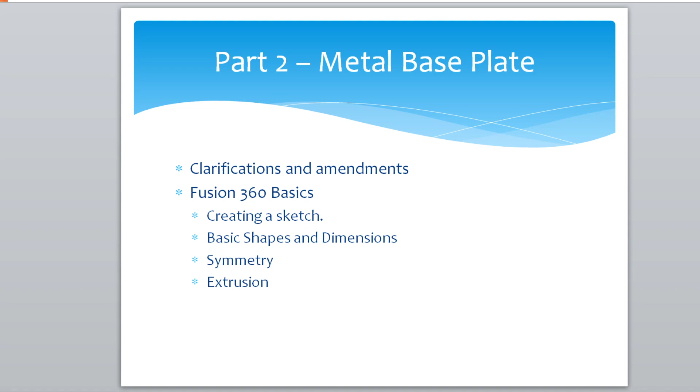Now for the third one, what we're going to look at is we're going to continue our Fusion 360 basics, and create a cutout drawing for our switch. We're going to export this as a DXF file, which basically means drawing, but it's a file format. We're going to open our previous model that we created last time, and create a drawing with a pattern feature.

We're going to import the cutout DWG, and move the cutout around. Then finally we're going to use the 3D cutout operation, or I believe it's called extrude again in this package, to actually put the cutouts into the panel we've created.

So the first thing we're going to do is we're going to be looking at creating a cutout drawing. For that we're going to be using Fusion 360 as the previous video we did, and I've just started it afresh, and this is how it looks when you open Fusion 360 for the first time.

So all I'm going to do at this moment in time is create a simple drawing for the actual cutout switch itself. For the drawing, again I repeat what I did previously. I'm going to click the sketch icon there, and just select the top plane.

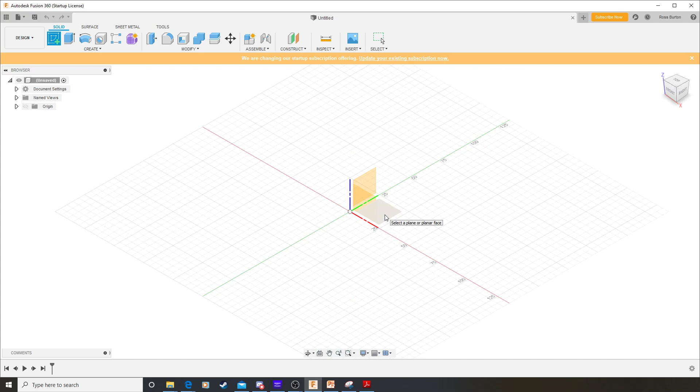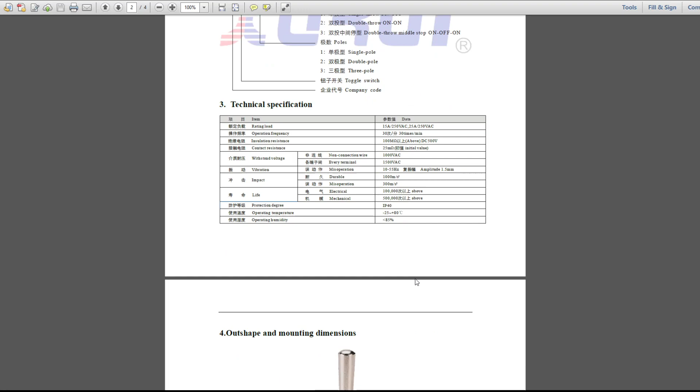Done. Okay, now the actual shape we're going to be doing, there's the question. So if I open the specification for the switch and we go down, we'll get to the cutout drawing here. We can see the details for the switch, this is the cutout drawing, and we can see what we're going to need is a 12mm circle hole.

So back to Fusion 360, and I'm going to just click create a center diameter circle. I'm just going to use the center point for this function, so drag out a circle, bang. Okay, and then as previously shown, we're going to dimension it to 12mm.

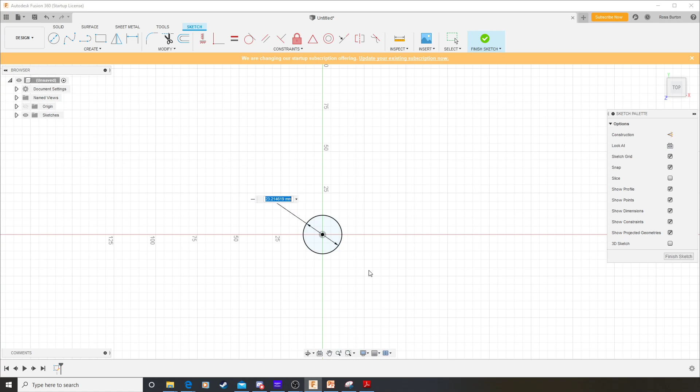So if we go back to Fusion 360, next we're going to create that feature. Okay, so I have a vernier caliper handy, and what I've done is I've measured and quantified that feature.

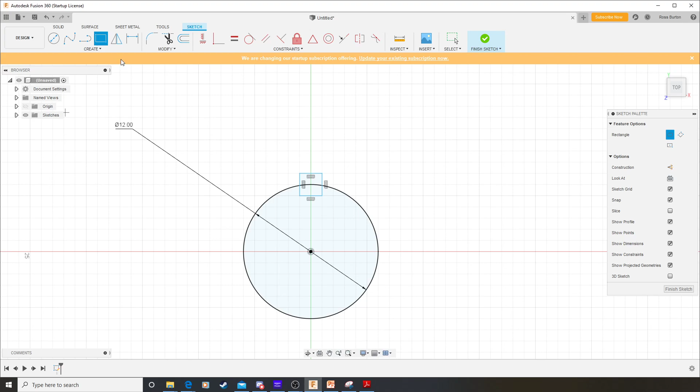So what I'm going to do for this moment is create a 2-point rectangle around about there, that would do us for starters. I've measured the dimension, and I know that this is 2mm wide. Now to make sure it's centered, what I'm going to do is create a dimension between there, and that's 1mm wide.

Now I could go through the process I did before, creating a construction line and a symmetry feature constraint, but because of the way I'm going to use this, I've realized it's better off just to create the actual pure parts that I need, the lines I need, because when construction lines are imported back in, they appear as solid lines and cause hassle and having to mess around.

Okay, so the next part, the actual tooth is away from the center line by about 5mm as I've measured it. So there we go. So now we've got most of the parts and information I need for this cutout.

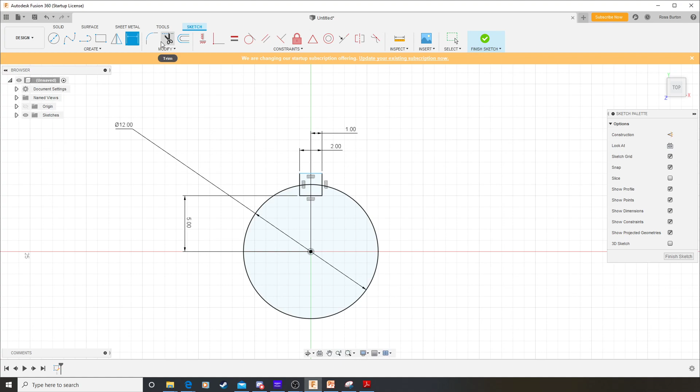Final thing I'm going to do, I'm going to use a new feature we didn't use previously, I don't think, which is the trim function. This allows us to remove unwanted lines. You will get warnings about constraints disappearing and such like, and sometimes you do lose important dimensions, but this time everything stayed in place.

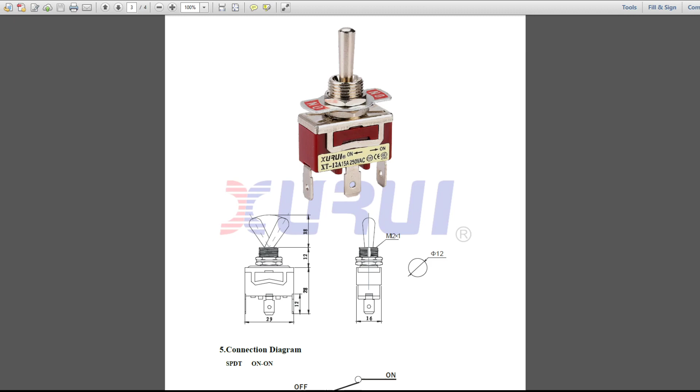So we now have, pressing escape, all the information for our cutout. And if I flick back to the picture, we can just see again that cutout is in the top center, as opposed to with the PDF where it didn't actually show the cutout, the key feature at all.

So Fusion 360 again. What we're going to do now, we're going to export this as a DXF file. The reason you want to export it is because you can then re-import this into other drawings, other models and things. And this is very useful.

Yes, you could, for every single panel you do, create your cutouts for every single switch individually, but that's time consuming. We're much better off creating a template of the port, the cutout, that we can then import into any panel we create in the future, so you don't have to rework your cutouts. It's saving time. So what we're going to do, we're going to close this sketch.

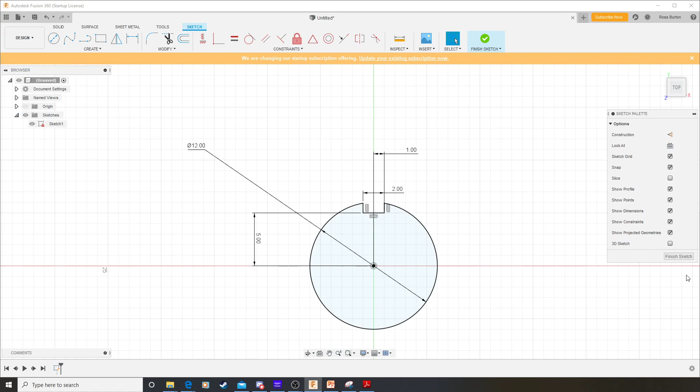Okay, and just to remind you, we can reopen a sketch by right-clicking and selecting Edit Sketch there, or down here. And then what we're going to do, we're going to right-click on it and do a Save as DXF.

Okay, so at the moment, I have none. Okay, so this is just my folder structure. What I'm going to do is I'm going to save it as a DXF. Where am I going to save it, I wonder? What I'm going to do is I'm going to create a new folder.

I'm going to call it Cutouts. Okay, going to open it up, and I'm going to put 12mm toggle switch cutout. I'm going to save it. Okay, and that's it done.

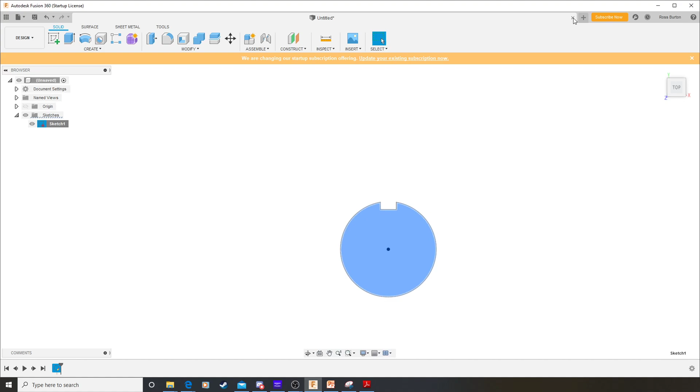What I'm going to do now, I'm just going to close this. Shouldn't need to save this, so I can close this. So we've now created our cutout.

The next stage is we're going to reopen our previous file we created, the previous drawing we did. So I'm just going to click File, Open, and then here we can see, if I look here on the right hand side, I've got all my templates I created for you last time, and I'm going to select the 9 DZUS aluminium plate. Open. Okay, so this is what I created previously for you guys.

We did include these screw holes here, and I'll remove them in a second. I'll show you that. But the first thing I'm going to do before I do anything else, I'm going to do a Save As.

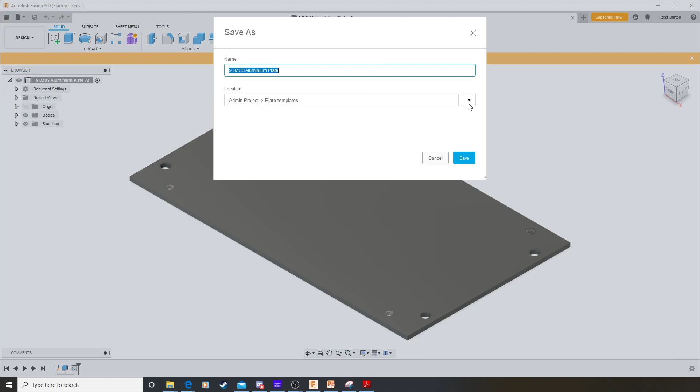And I want to select where I want to save it. So Admin Projects. And I'm going to create a new folder here. No, I'm not. I think I've got Fuel Panel. There we go. I'm going to save it as Fuel Panel Video Aluminium Plate.

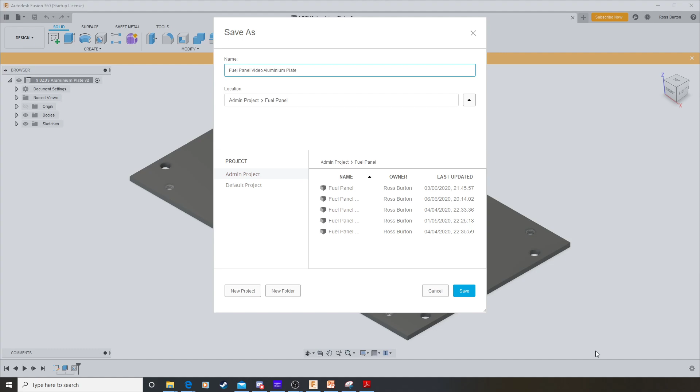So now I've got this saved. Now, what you can do if you are importing mine and you don't want to use these features, you can simply right click and delete it, or in my case what I'm going to do is I'm going to suppress it. So how do we go about getting those cutouts onto our aluminium plate?

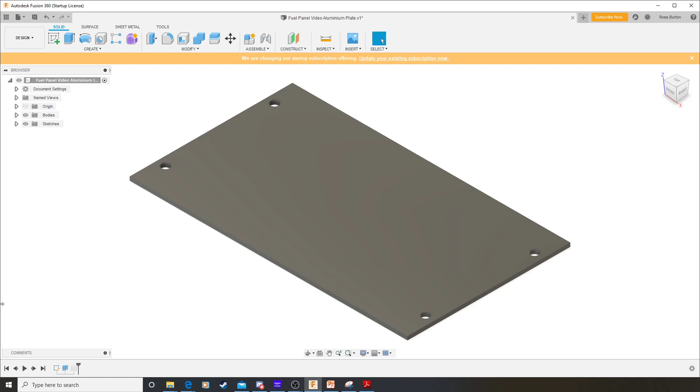Right, so what we're going to do, create a sketch again. So I'm going to create a sketch, but instead of selecting one of these planes here, what I'm going to do is select the top face of the previous model we created. And now we're creating a drawing on that top.

Okay, and what I'm going to do is I'm going to create a point. This might not make sense at the moment. I'm going to create one point there. Excellent.

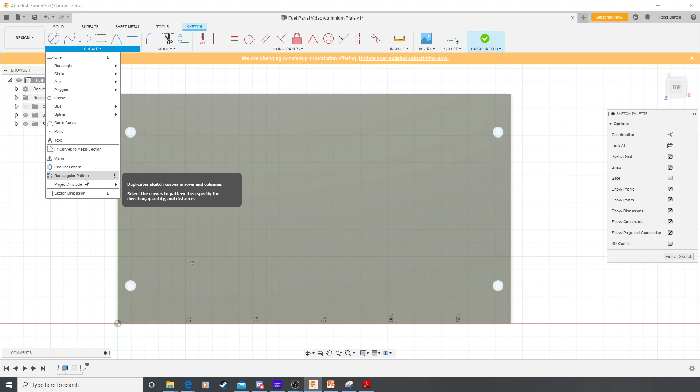And now what I'm going to do is create a pattern, because if I look at my pictures, we can see that even though in DCS we have one hole which is a bit offset downwards, if I look at the actual real picture on the left hand side, we can see it's actually just a simple 2x3 grid of holes. So what I'm going to do is create a rectangular pattern, and select what I want to pattern.

So I'm going to want to pattern this point here. At the moment it's highlighting this arrow. I believe it's this one up here. Oh, hang on, I'm not showing Fusion 360, apologies.

So I created my point, went to create pattern. This is showing the direction this pattern's going in at the moment. So it's going 3, and I want to change it, if I come across on the right, from extents to spacing, because that's just my preferred way. And I'm going to start playing with the dimensions a bit.

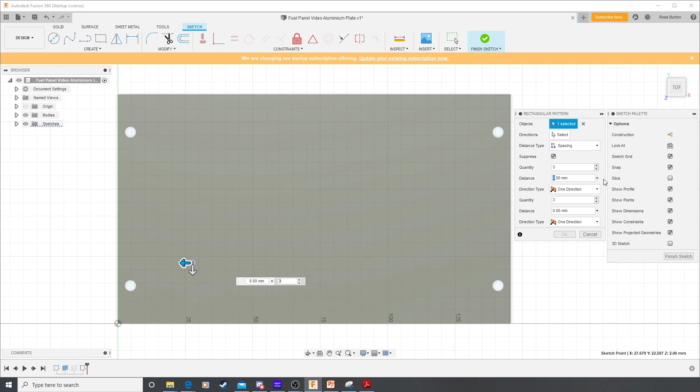So let's say 50 millimeters apart for starters. The direction is wrong, so I'm going to make it -50. That looks a bit too far, so I'll bring it down to 40. These dimensions I'm going to be a bit arbitrary with at the moment - I'll be going back over this and selecting more appropriate dimensions later, but right now I'm just trying to show you the process.

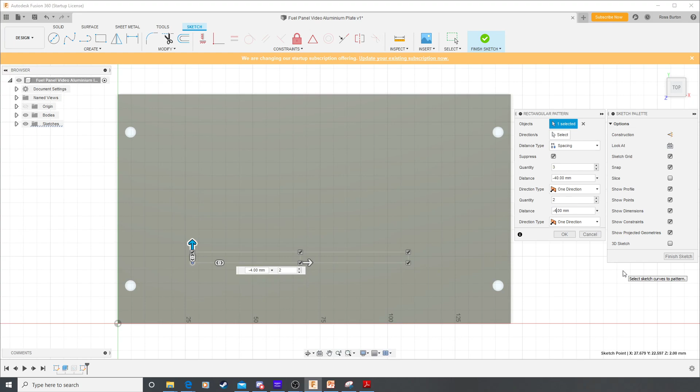So next we want a pattern in the other plane, going upwards, this plane here. On the right, I'm going to select a quantity of 2, not 3, and have it going up. Let's try 40 again, and I'll go -40 because I can tell by the way the arrows are pointing it's not going to take me in the right direction. So now I have a set of 4 points.

Next I'm going to create a construction line because I want to make sure this is centered. Did this before, making sure you get that little triangle to say its midpoint. Escape to close that. Line, change it into construction, and I'm going to repeat the process on the horizontal plane.

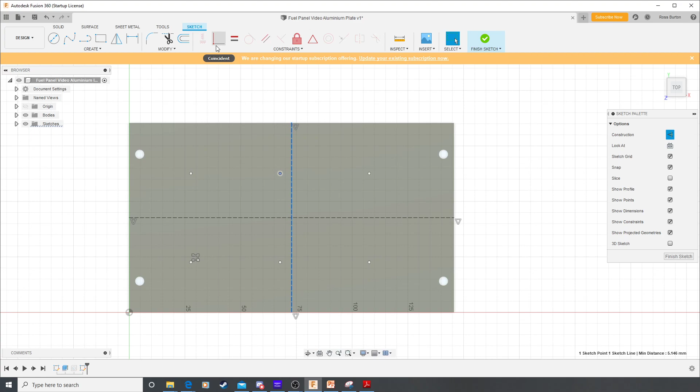And finally what I'm going to do is make this line here - left click the whole point and left click the construction line while holding control, and select constraints up here, and make it coincident, which means it's aligned. As a final step, I'm going to use a symmetrical constraint between these points and this line here.

I could of course manually set the dimension there. Now I can, by double clicking on this little feature here, go back and adjust my pattern, but as things look, that doesn't look too bad for what we want to achieve. So next, I'm just going to click save again, click finish sketch and save, just to make sure I don't lose anything, because Fusion 360 does crash occasionally.

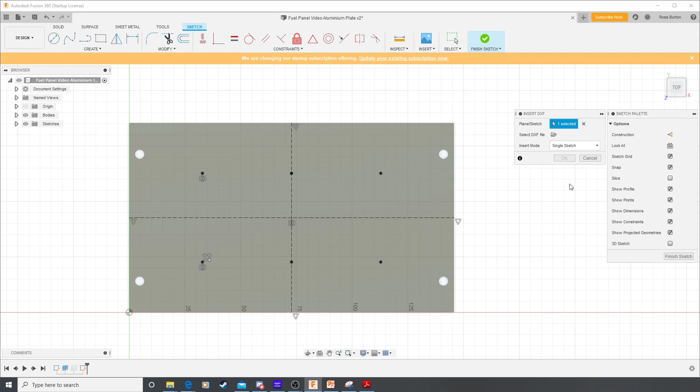And now I'm going to go back into my drawing. This is where the cutout comes in. So what I'm going to do is select insert, insert DXF. Plane, it's in the sketch, one selected already, open here, and here we can see cutouts, and here's the DXF file that I previously exported.

Click open, and it brings it in. It's created it down there, so it's not perfectly located, but what I can do is just have a look here, and I can actually physically move it. So I'm going to just move it here for now and click OK. So that's brought the DXF in. At the moment, for my view, it's upside down.

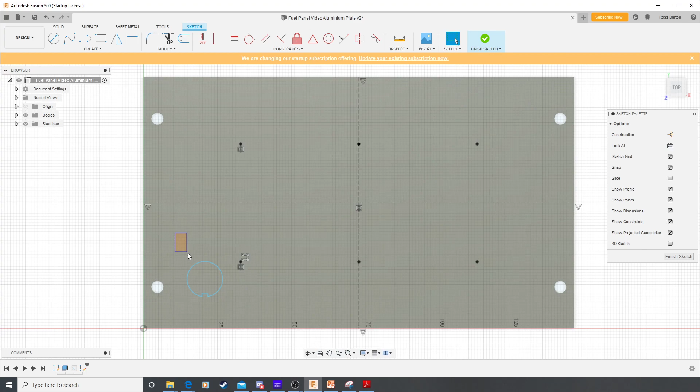So first thing I'm going to do is left click and create a box around it. Left click, dragging right, selects only stuff inside the box. Left clicking, dragging left, selects everything that is even partially in the box.

Going back again, left click. What I'm going to do is go to Modify and carry out a move copy operation. First I'm going to drag it around 180 degrees so the cutout's on the top, and then I can move it like this.

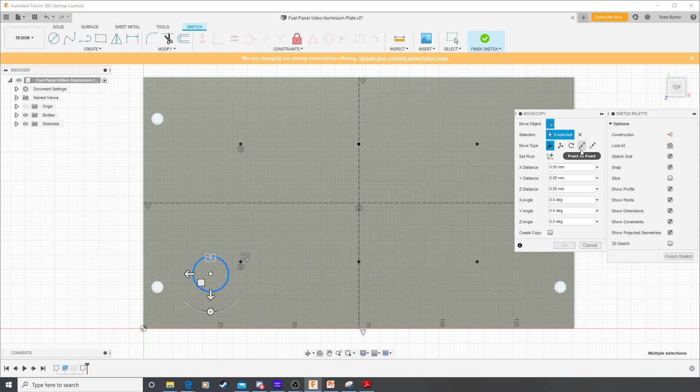I'll click OK for that, then reselect it and carry out another move operation, this time using a point-to-point movement. Select the origin point to move it from this point here, select a target point, and move it to that point there. Then OK - now we have our cutout in place.

Now, we could just create a rectangular pattern of this cutout using those dimensions from the project before, and it'd be all in the right place. I'm not going to do that because you might well find that different switches have different cutouts, so instead I'm going to do a move copy feature.

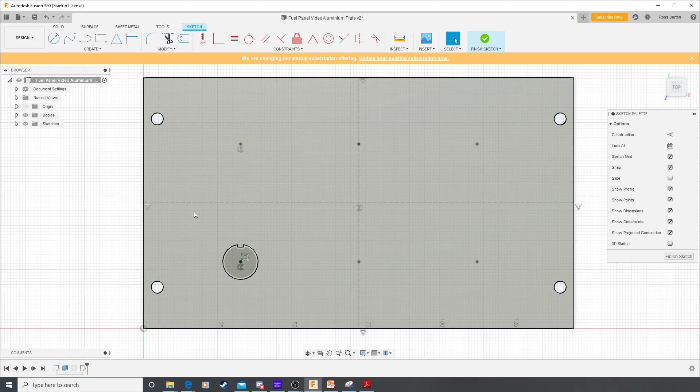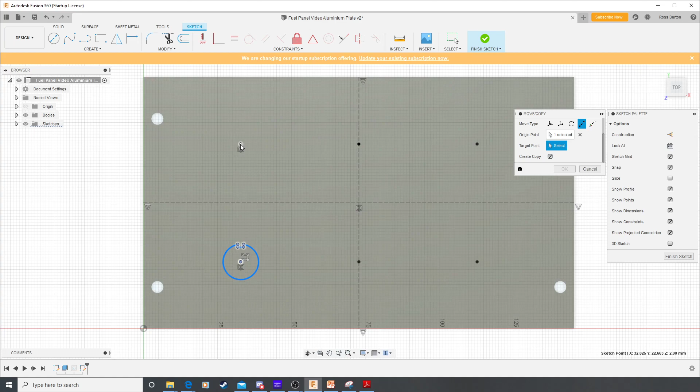Selecting it all again here, move copy, and I'm going to go point to point. This time I want to come upwards, so I'll select create a copy and select origin point - make sure select origin point selection is highlighted. Select point 1, select point 2, and that's created the copy.

I'm going to basically repeat this same approach again to do the other points. Like I said, in some ways it might well have been better just to do a pattern process. You can, by the way, do the move commands, then create the copy function there.

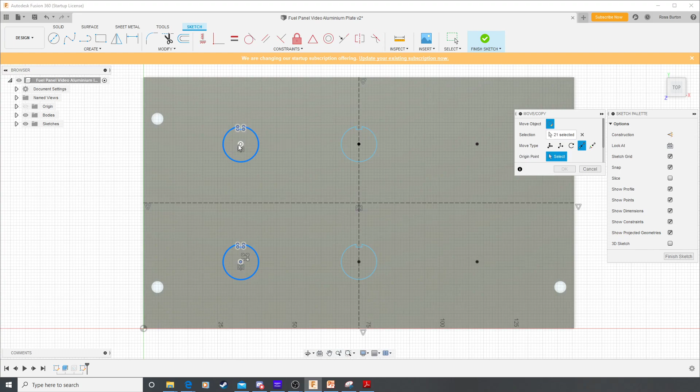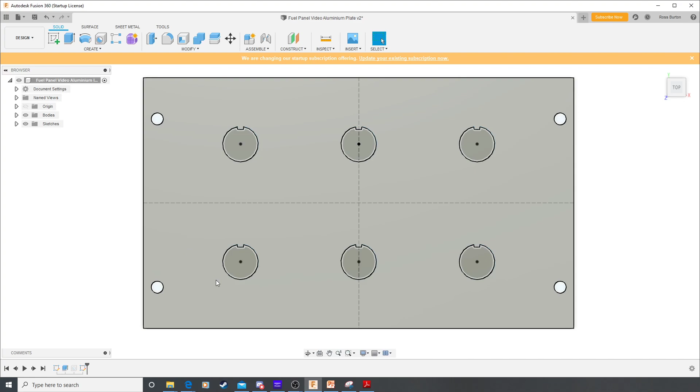That gives us the four ports in our sketch. I'm just going to finish the sketch now. Of course, we can use dimensions to look at these points - you don't even need to do the points, you could just literally copy in the cutout and move it directly, but I'm trying to show you multiple features. Now we have our sketch finished on our model, so I'm just going to click this little house building icon to give us a nice view.

The final thing we're going to do today is create the cut function. Some places call it cut, different software packages use different terminology. All you do is click cut extrude - the operation is going to be a cut operation, coming from the profile plane. Direction, it's going in, one-sided, and for distance you can type in a distance you want it to go, or you can go through all, and then finally objects to cut.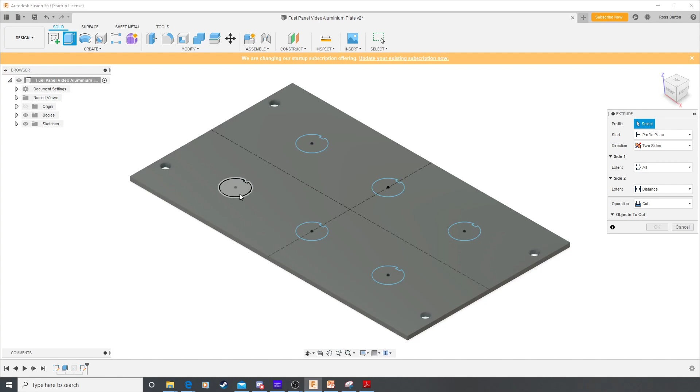I'm going to create it just two-sided because that should make it behave properly. Of course it would be helpful to select what I want to actually cut. The very first thing you want to do is select the shape you want to cut - it doesn't need to be symmetrical at all, it can just be one-sided. It's going through all.

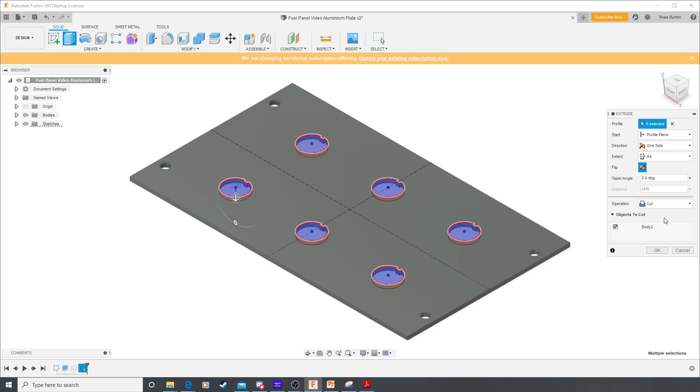There we have our panel with our holes. Now this could well be the end of your journey into making a plate - we have our cutouts. You could machine this out of aluminium, plastic, MDF, whatever you want. Cut these little holes in and assemble your switches in and go, yeah, I'm happy. And if you're using VR, that would possibly quite easily be enough.

But although this is the end of this video, the video will be continued, and in the next video we'll start to look at the acrylic plates that will go on top.